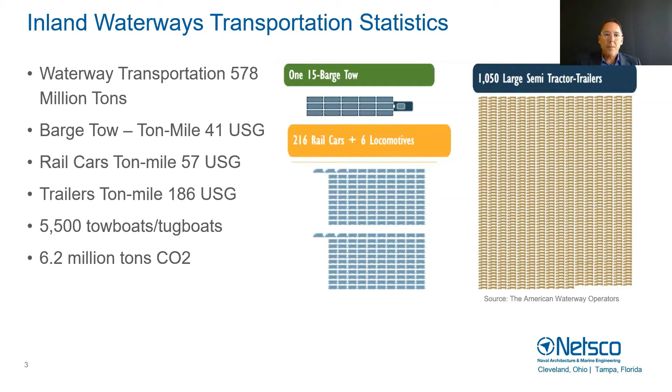We can move to the next slide, please. As I said before, regulation is a huge driver in environmental compliance. The reason is because even though some environmental compliance initiatives eventually turn out to be very cost effective, the cost of entry is always high. So there always has to be some incentive, and regulation in the maritime industry is usually the driver.

I want to talk about how this applies to the inland waterways, because it's very specific. As of two weeks ago, anybody who's seen the news knows there was a ruling against the EPA and their jurisdiction. For now, our understanding is the EPA sets the standards and regulations for emissions in the marine world. When MARPOL, on the international level, obviously MARPOL is a convention within IMO that regulates environmental compliance. In this case, MARPOL Annex 6 is the one that regulates emissions. But MARPOL unfortunately doesn't apply to the towboats, because towboats don't have international documents.

If you move to the next slide, this is where we try to understand why we're looking at ammonia and what the problem with ammonia is. If we look at the one highlighted in yellow, that's your energy density, volumetric energy density.

As you can see, MGO has 3 times more energy per unit volume than ammonia. But when we looked at the carbon fuel coefficient, we see a pretty drastic change - from nothing to 3.2, which I believe is a ton of CO2 per ton of fuel. It's a metric, but what's important is that ammonia is carbon-free, while MGO actually has the highest carbon fuel coefficient. So how do we get over the hurdle of energy density so we can get greenhouse gas reductions? That's the $64,000 question.

Let's go to the next slide, please.

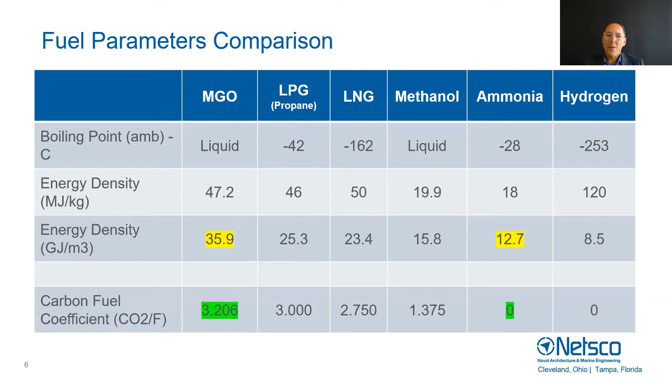This one, very quick - this is just a bit of the metrics of using ammonia as a hydrogen carrier. In the interest of time, I'm not going to cover this too much, but basically, as we can see, you can pack a lot more hydrogen in ammonia than in hydrogen itself. As we further talk about hydrogen in this presentation, we're always going to talk about it in the context of being stored as ammonia.

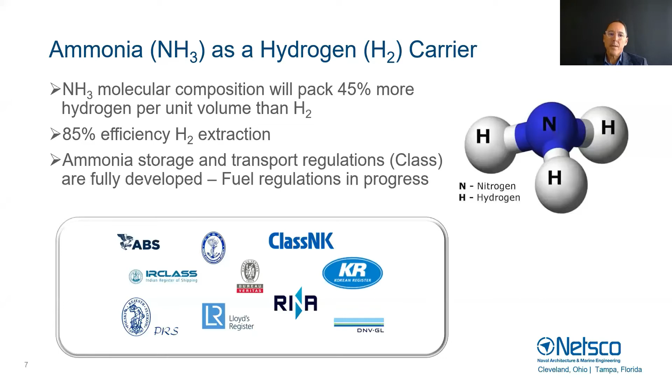Let's move to the next slide. Talking about towboats on the Mississippi River, there's about 5,000 towboats in the river. They have a very efficient propulsion train system, traditionally a medium speed engine for the larger towboats, and a higher speed diesel engine for the smaller towboats. By the way, as far as I know, everything in the river uses low sulfur diesel because of EPA requirements.

There are some 2-stroke engines in the river. EMD is very common - in fact, the picture on the lower right is an EMD, probably a 645, which is a very common 2-stroke engine. It's very robust, and EMD has done a pretty good job converting these engines to burn LNG. Unfortunately, they don't meet any emission requirements, but today in the river, if you have an EMD engine - I believe their latest model is the 710 - you can burn LNG.

They have 2 ways to do it. One is what they call dynamic blending, which is like a dual fuel setup - basically you're injecting LNG into the combustion, and with that you reduce the NOx and SOx of the engine. And if LNG pricing is down, well, you get some benefits there.

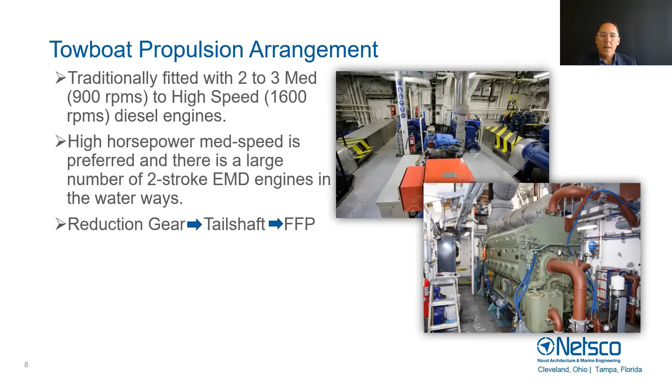Can we move to the next slide, please? All right, so this is where I think what we came here to talk about is, okay, how do we go from point A to point B? So there are 2 ways today to go from diesel fuel to use of ammonia.

One is the internal combustion engine route, which, as Sofia mentioned, MAN is going to talk about in the next webinar. MAN is one of the leaders on 2-stroke ammonia power engines. One way to do it is injecting ammonia into the diesel feed to the engine. There's been a lot of tests done there, and fair enough, but it's not efficient. You create NOx. On lower concentrations, you don't get the benefits of the carbon reductions. On higher concentrations, you start getting NOx, so it's not efficient.

The other option is hydrogen into diesel. Again, it's a very complex system to do. They're doing it right now on power plants, but we see on towboats it's too much complexity, though that's an option. And of course, the other option is the actual internal combustion engine, where Wärtsilä has already announced that they will have a 4-stroke internal combustion engine by 2024, 2025.

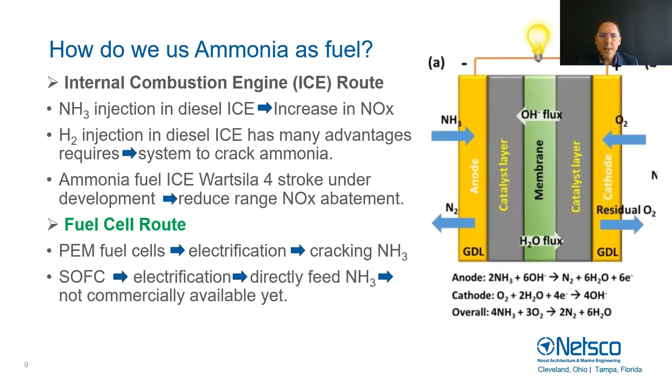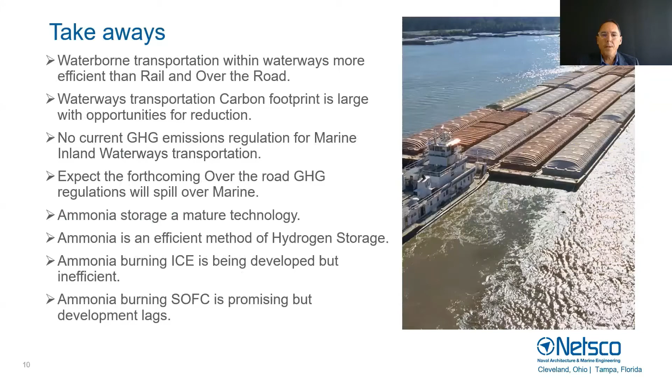So I have takeaways, but in the interest of time I'm going to skip those. Could you go to the next slide? I just want to make sure I didn't miss anything. No, so these are the takeaways, so we can keep those for the end of the presentation so that we can go to the Q&As. Again, sorry, I was rushing a little bit, but I want to get into the Q&As, and we can get into a little bit more detail there.

Thank you very much, Jan. That was very informative and a little bit of a lecture in itself. That was great, thank you so much.

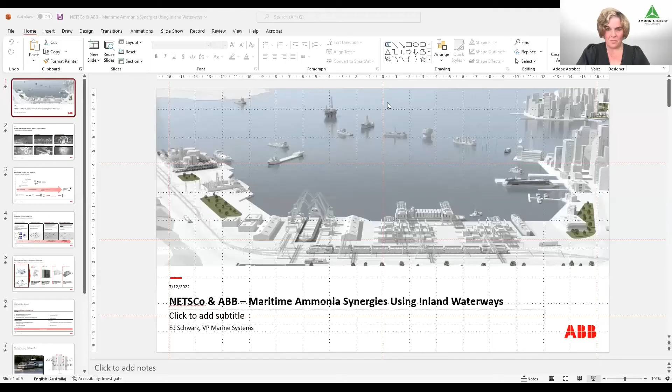So I started my career as an engineer, shipboard engineer. I have a chief engineer unlimited license, and started my career, even though it doesn't feel very long, mostly on steamships. Mostly sailed on steamships because that was what was available, and a lot of the U.S. flag container ships were running steam plants, and that's what I was sailing on mostly. I upgraded my license to first engineer steam, and now I get to talk about and work on these types of projects. So through a career of starting on heavy bunker fuel to now this transition to ammonia, it's definitely a fun time to be a marine engineer.

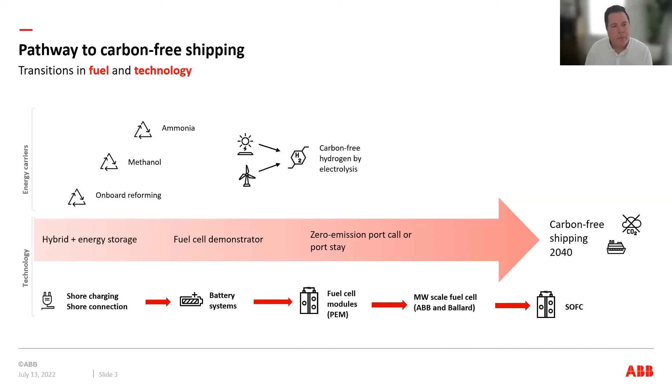What do we see as ABB? We're an electrical engineering, integration company, a systems company. What we're seeing is this progression in electrifying of vessels. This is kind of the backbone that allows for this decarbonization.

All the way to the left, you can see historically diesel mechanical systems. As Jan talked about, you've got a gearbox, a propeller, a direct coupled engine, which has a lot of advantages. Disadvantages, it's really hard to introduce any of these new technologies with this type of system. So we've seen for a long time, over 100 years, we've been utilizing diesel electric systems on board vessels. It's certainly nothing new, and certainly nothing new to the oil and gas industry, which has been creating power using diesel engines, generating electricity on board and then distributing that electricity to your consumers.

Pretty much all cruise ships are built this way, and pretty much almost all the oil and gas service vessels, where you have this kind of varying load situation. So to help improve reliability is number one, and number two is to reduce fuel.

But now what we're seeing is we can do even better than diesel electric, moving to these hybrid systems. Now we have the introduction of energy storage, and the introduction of powering from the shore side. I don't think you can open up a maritime publication without seeing some notice of a new battery operated vessel or some type of low emission hybrid vessel hitting the water. So we're seeing this becoming more and more commercially mature. More regulations are being developed around this, so it becomes easier and easier to implement.

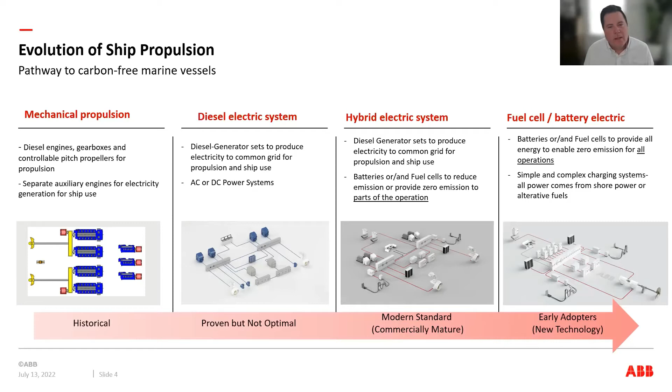I think I touched on some of these benefits, but I'll go over this briefly. Once we go to this electric propulsion, it allows for easier integration of shore power, fuel cells, batteries, and electric propulsors—motors driving propellers, which are more efficient than gearboxes. This is kind of the transition and the benefits we're seeing that come with decarbonization.

But one thing that's very important for electric is it allows for future integration. As we all know, especially on the inland side—and Jan as a designer knows this all too well—and since we're concentrating on US Jones Act vessels, but this is true globally, I think it's most extreme in the US, the vessel life is 40 to 50 years. There's going to be a lot of technology progress in the next 50 years. I don't think anyone assumes they're going to be driving the same car with the same engine 50 years from now that they could buy today at the dealership. But yet you have to design your vessel today for this long life.

So what we're thinking is with an electric system, it allows for integration of higher density energy storage in the future. It allows for replacing diesel generators with fuel cells in the future, for adding shore power for cold ironing or charging later, once there's more infrastructure in ports for shore charging, or shore charging becomes a requirement for a lot of green ports. So the benefit of electric is it really makes the vessel more versatile for retrofitting and upgrading in the future. Diesel mechanical vessels are very hard to introduce new technology to. So that's one of my takeaways from this.

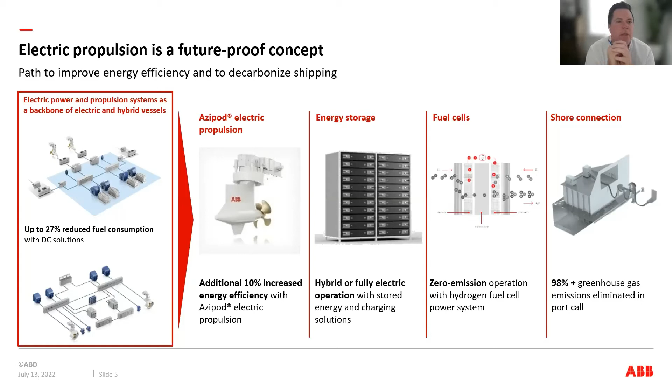Yeah, I had to talk about ammonia, of course, being the topic. So some of the things that we're learning from some of our friends in the ammonia industry.

Everyone's talking about well-to-wake, and the topic is always how green is the fuel. It's a little frustrating that everybody wants to talk poorly about early adopters who may be moving to, say, using energy storage, but the power plant is not 100% renewable energy today. Maybe the power plant is still a carbon fuel, typically a more efficient way of getting energy, but it's also going to be moving towards more renewables in the future. So everyone wants to know the path towards green ammonia.

How do we get these fuels and how do we get them green? This is some of the information we've been getting from green ammonia production, and you can see there are challenges. On the well side, certain things are looking positive. On the distribution side, yes, we have a lot of distribution, Jan touched on that. But storage on board is definitely a challenge, especially comparing it to what we're used to with diesel fuel. And there are some safety challenges. So there's a lot of challenges there, and that's not dependent on green ammonia, that's just the nature of ammonia.

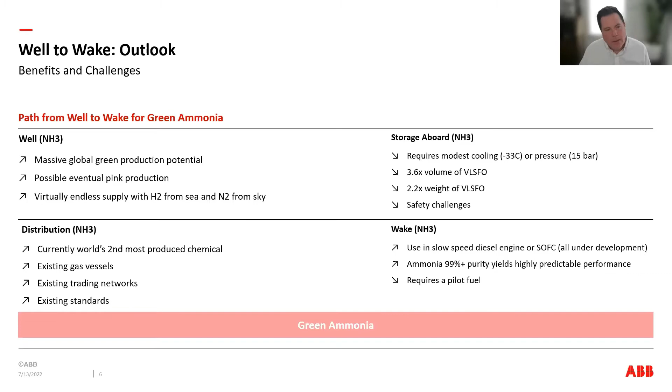And then in the wake, in the consumption, there are a lot of benefits, but there are also some challenges in the design. So we certainly acknowledge the benefits, but we also have to design for the challenges. And then I believe I have one last slide.

Okay, so people might be, it's not an ammonia project, but it is a fuel cell project. It's a methanol towboat that's in the news right now, since we're talking about the inland side using fuel cells. One of the things that's interesting with this topic, and Sofia and Jan and I were talking earlier about this in preparation, is you have these really large global fleets that typically lead in new technology development.

They have the global benefits of working multinationally, big stockholders, high profile, and they're usually the ones that introduce new technology because they can. But what we're actually seeing with a lot of this green technology is reversed. It's short distance shipping that's introducing new technology, which is a first for the industry.

And when I look at towboats like this, how hard it was to get adoption of, say, Z-drives for safety, and ZF worked very hard in getting Z-drives, and now hopefully there'll be L-drives in the future. But to see these inland, relatively small on the global scale, companies being these first adopters, really learning and developing this new technology that does benefit everybody, including the large companies, because a lot of this is the design that it takes.

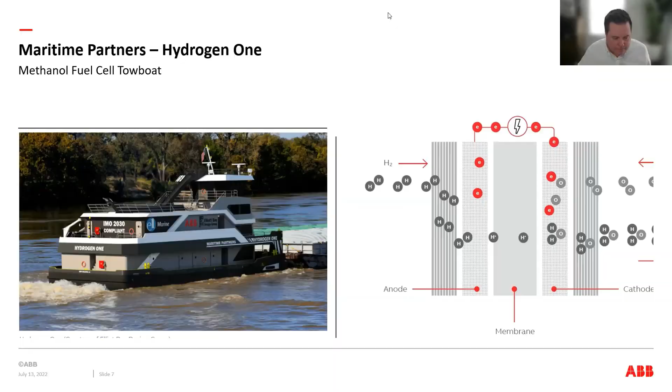Hopefully I get left enough time. Thank you so much, Ed. That was very interesting. I'm bursting with questions. I've been sitting here with my hot seat for a long time now, and we have two very talkative participants today, so we will have to spend our time wisely. I invite all of you to share your questions in the Q&A tab, and I will try to pick up on those as they come along.

But when we spoke first with Jan and Ed, I raised the question about why we should have ammonia propulsion on these smaller inland vessels and not look at battery electric propulsion instead, because when we look at the development of maritime ammonia, it's primarily happening on the larger vessels.

So you had a very good answer to that when we spoke last time. Yeah, it's basically driven by range. Battery technology is very efficient, and it goes back to energy density - that's basically the problem. We did some studies on fleet tugs, which go to and from the towboat fleet and back to the dock, and there are some advantages to using batteries. But once you cross that one hour, two hour threshold, you need another fuel.